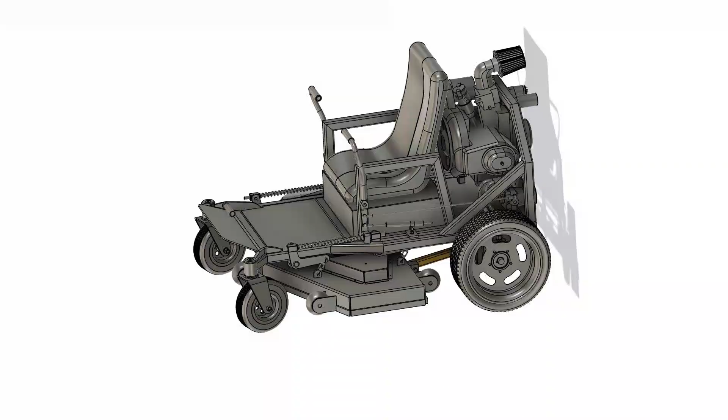The universal kit can be used in a wide variety of applications. To determine if this bolt-on style kit could work on your mower, let's take a look at a mowing deck and answer a few questions.

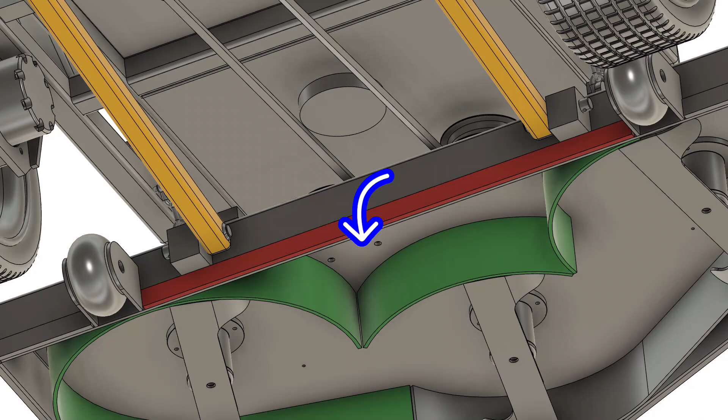First, is there a flat surface on the back of the deck where we could mount two 1¼ by 4" long angle brackets? In this example, the extra bar that is shown in red would prevent the brackets from bolting on. Also, some decks will have a lip in this area which will also interfere.

Second, is there enough room between the tires and the back of the deck for a striping assembly that extends 4½ inches? Some newer decks have tires up very tight to the deck. This deck has anti-scalp wheels, so you may be able to utilize those brackets by removing the small plastic wheels and bolting to those existing brackets.

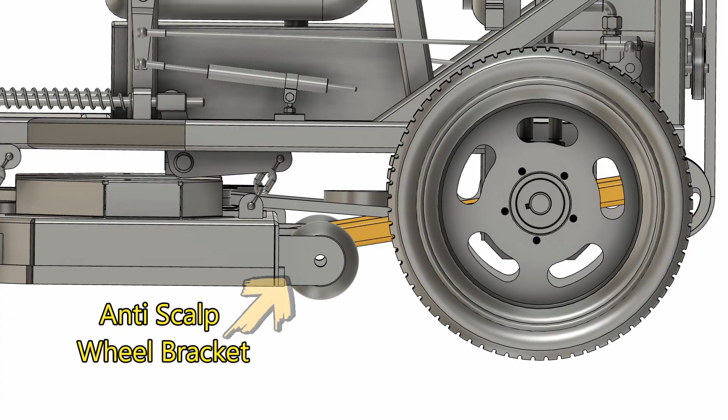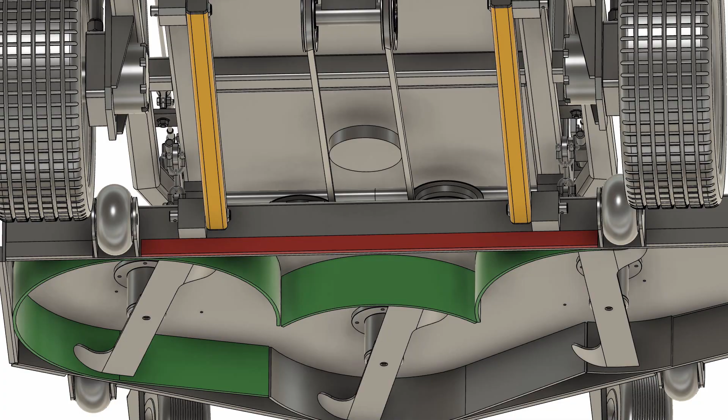Third, if the tires are close to the deck, is there room between the tires to mount a shorter striping kit? The tires are already pushing the grass down, so we can stripe between them by fitting a roller as wide as possible. If we remove the extra bar, we would have a flat surface for mounting. However, we still have to account for the interior baffles, shown here in green, that will interfere with bolts passing through the deck. Even if your deck does not have the baffles, make sure you're clear of the mowing blades.

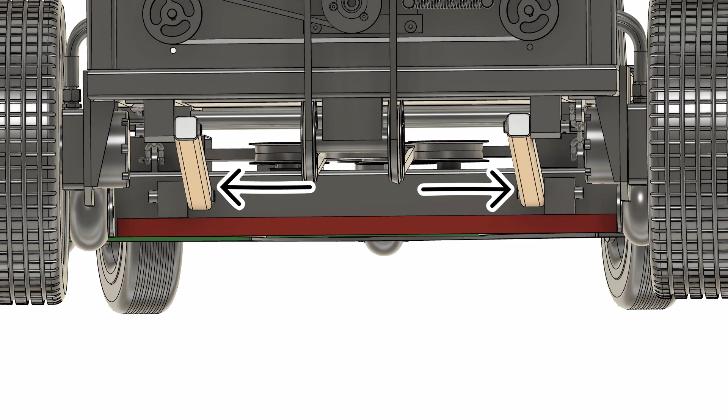Lastly, is there any supporting hardware or other machine parts that the roller will hit when the deck is raised to maximum heights? Lower mowing heights may not be possible if your deck has support arms, such as these highlighted in yellow, which may contact the roller if it's adjusted to a higher position. If you have airless tires, be sure the roller straps will clear them when the deck is all the way up.

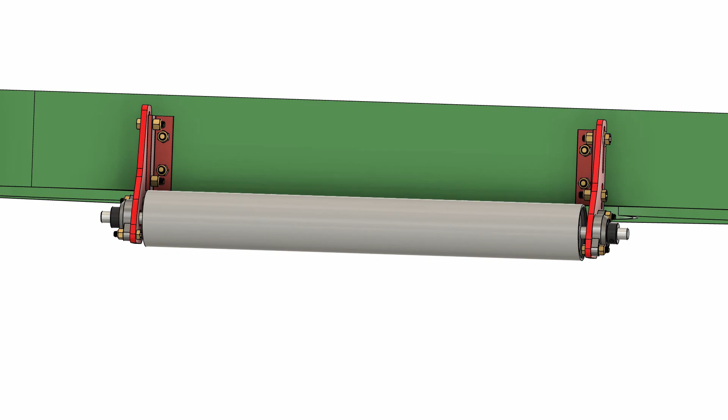Here's a look at a universal kit that is mounted on a deck. You can see the location of the angle brackets allows the bolts to pass through the deck without hitting the baffles or any mowing blades. With the brackets mounted, we can now measure the distance between the outside of the brackets to determine our roller size. This example shows 39¾ spacing, so take off 3/4 inch and we know a 39-inch roller will fit.

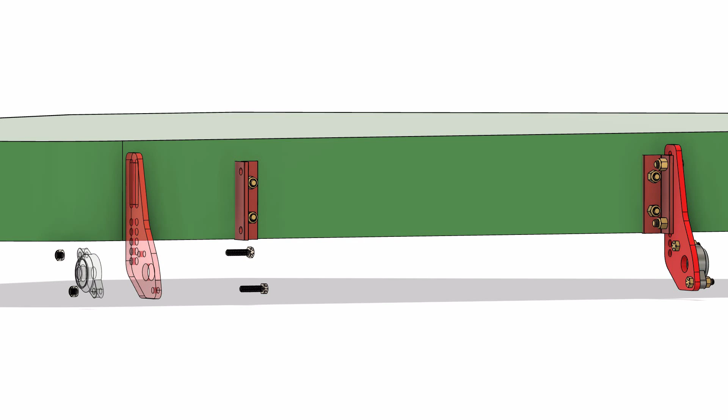Assemble the bearings to the brackets as shown with the grease zerks pointed upward. Attach one side, assemble the other side, and install with the roller. Install locking collars last and double check that the grease zerks are tight.